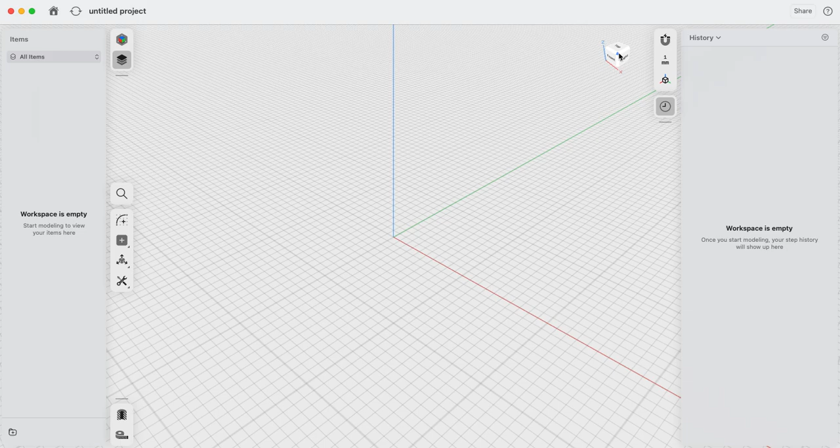Alright, so in this video I am going to make an extruder die that is a sort of a flattened coil. And so what I'm going to do is I'm going to go up here to top, and I'm going to take my rectangle tool here, and I am going to draw a shape that I need to be 26 millimeters by 9 millimeters. Now you can stretch it to those dimensions or just type in when these are highlighted here.

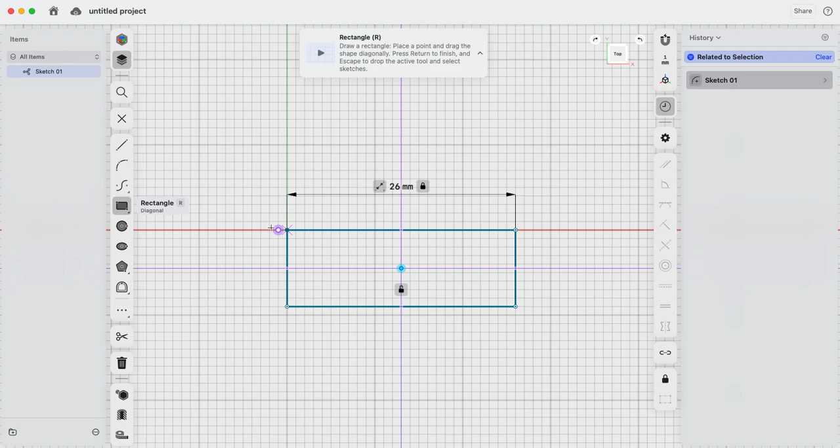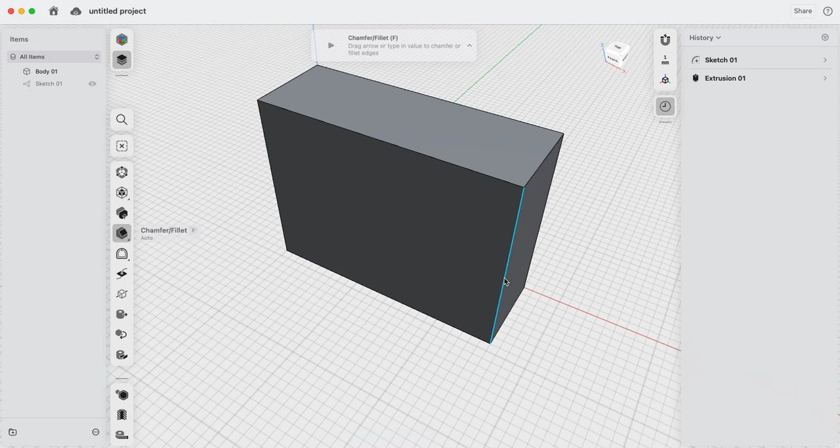And so okay, so now I'm going to deselect that, and I'm going to rotate this around. I'm going to select the face here, and I'm going to pull this up to 20 millimeters. Now the 20 is going to be too tall, but you'll see why I do that here in a minute. So now I'm going to select the edges here, and if you just select one and then just rotate around and just shift click, so I'm selecting all four, and now I'm going to move these in here.

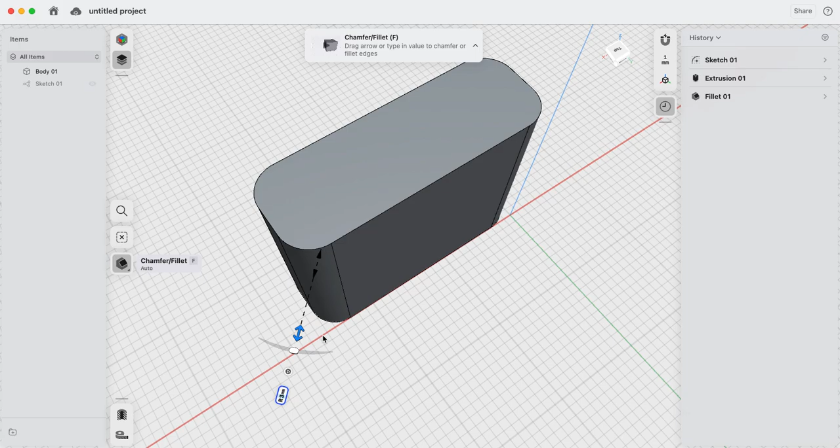Now, obviously you make any shape you want for the extruder, so I'm just going to set these at 3 millimeters, and that way this will kind of give me this extruded shape that's like this, with this kind of long thin form with some slightly rounded corners. Okay, so now I'm going to go to the top view again, and I'm going to double click this so I can select the whole thing.

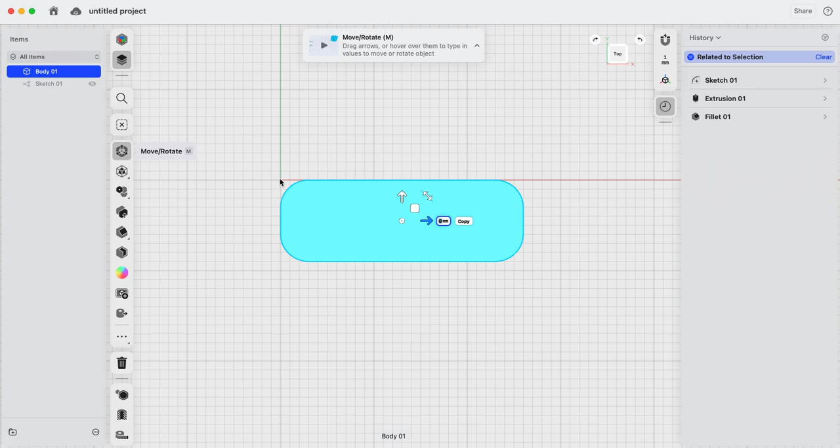And what I'm going to do here is I'm going to just see, this is the center of this object, and this is the origin right here of the drawing. And so, it's not super critical in this to have it exactly in the center, but just for the sake of aesthetics, I'll just put it right in the center. Okay, so now I'll deselect that. Okay, so now you can kind of see what we have here.

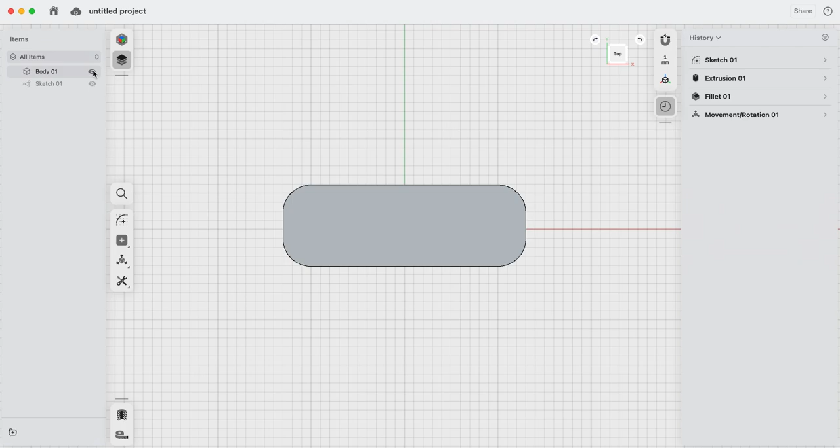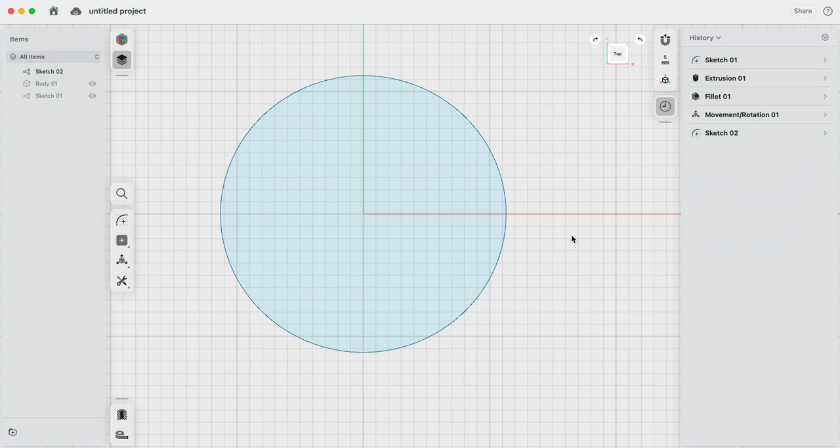I'll go back to top here, and what I'm going to do is I'm going to hide this body, and so that way I can come back over here to sketch, and I'm going to pick the circle, and I'm going to then pull this out. Now our extruder dies for the Emico extruder that we have in the studio are about 113 millimeters. So let me zoom out of that just a little bit.

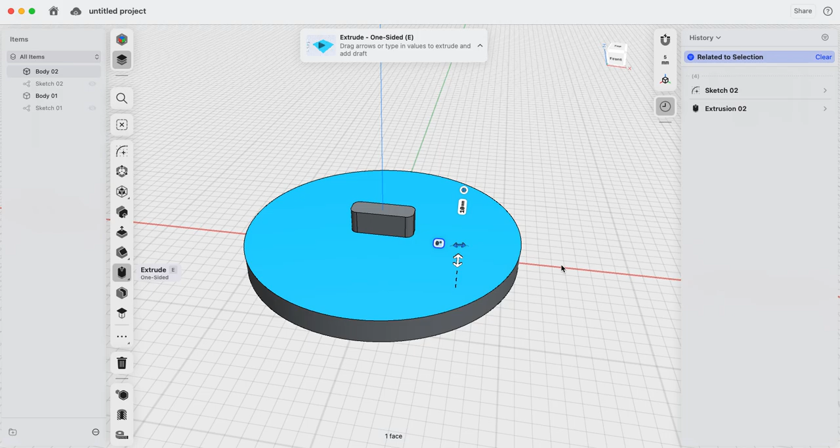And so now you can see I have this drawing here, and then what I'm going to do is I'm going to turn the other body back on here. Then I'm going to select this, and you can either pull it up manually here until you get to 10, or just type in 10, like that. And so now when I deselect this, I'm going to select this body here and just pull it out here, and you can see it goes all the way through. Now I'm just going to hit delete once that is clicked, and so now I have this shape here.

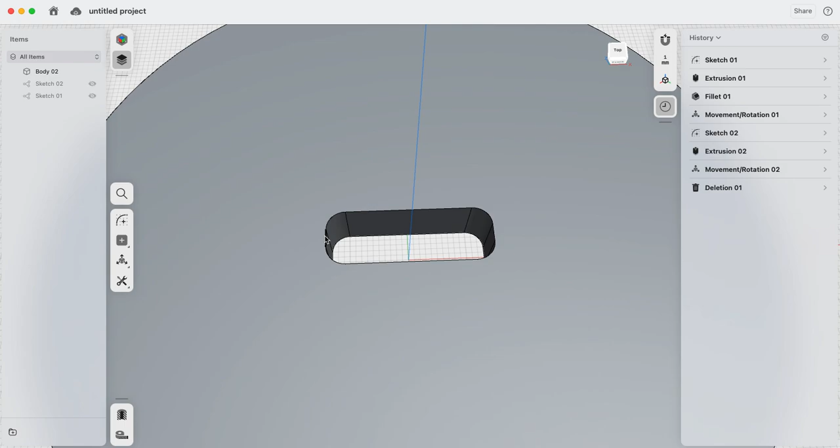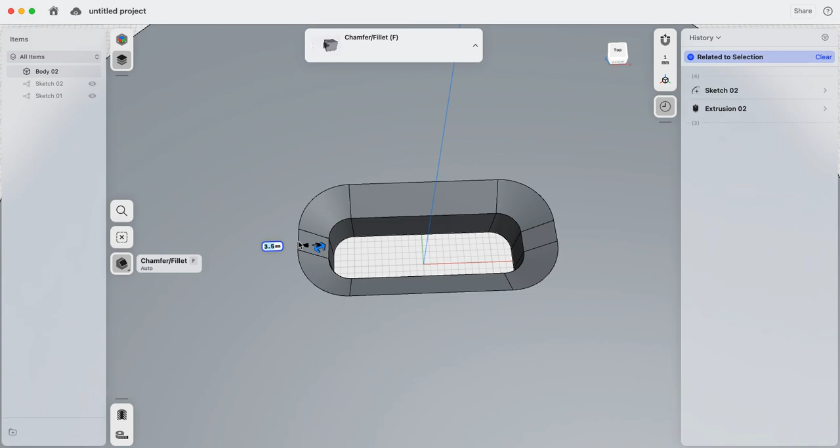Now what I want to do is I want to bevel this inside edge so that the clay doesn't tear too much. I can get a bevel here that will kind of compress the clay. So I'm going to select just the edge here, and I'm going to go around, and I'm going to shift click this, like that. Sometimes you have to kind of zoom in, so you're clicking on just the edge here. And now I'm going to put a bevel here by just sliding that out. And so I will do something about like that, 3.5 millimeters, and deselect that.

And if I zoom out, now I have an extruder die. It's flat on the bottom, and it's got a little bevel there where the clay can kind of get compressed through. And so then I would just save this as an STL file, and then move it into a slicing software to print. On the slicing software, I usually set the infill to about 30%, and that will typically be strong enough. If you feel like it's still flexing, you can either add infill, or also you can add top and bottom layers.

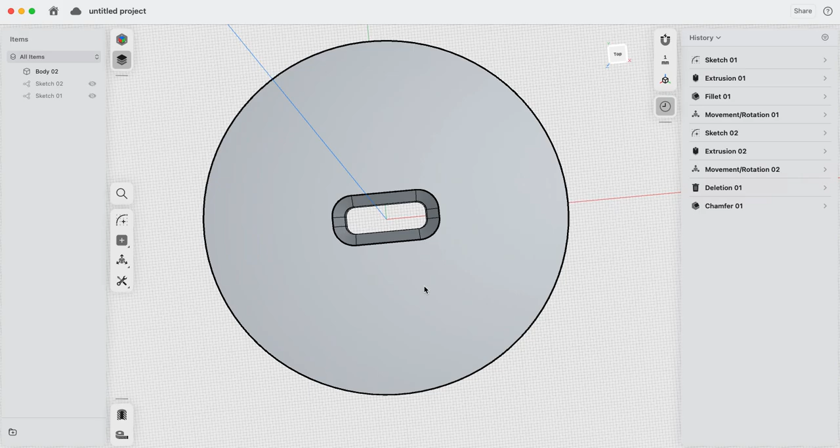But that's how you'd make an extruder die, and obviously you could do several of these. Like, you could have this be multiple slots here if you want. For example, I have one that extrudes little 1/4-inch squares, and I have probably 10 or 15 of them on the same extruder die. You could also design a profile of a handle, for example, and extrude that. So the process will work for a lot of different shapes. So the best thing to do is just get in there and try it, and looking forward to seeing the results.